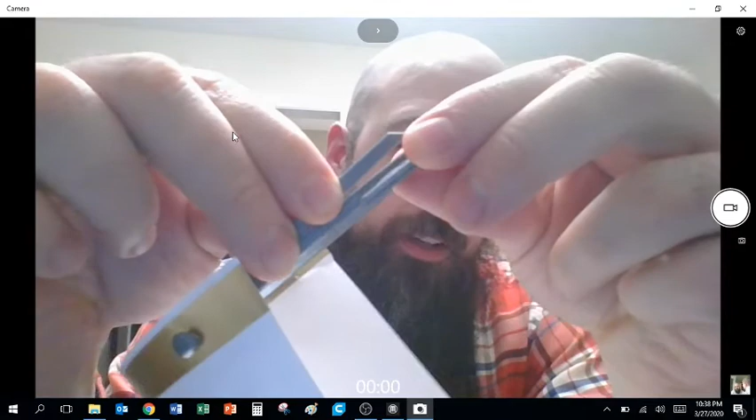I've already printed one. The first one took about an hour and a half on my Ender 3, which is different from the MakerBots. It fits a normal 3-hole punch piece of paper well, so if we get plastic sheets, using a 3-hole punch to punch the holes would be perfect. Something I noticed is I printed this at 50% infill, and it cracked a little when I pulled it off the print bed. So we may want to mess with the infill settings to make it more rigid or robust, and I'll share anything I find.

So the rest of this video, I'm going to show you how I set up the slicer, and then I'm going to make another video showing how I set up my printer.

I'm going to be using the MakerBot Print Slicer program. If you don't have it, Google MakerBot Slicer and click the first link. The newest version is the one I'm using. When you open it, it'll ask you to sign in. If you don't have a MakerBot account, you can sign up quickly - it's free, just a username and password.

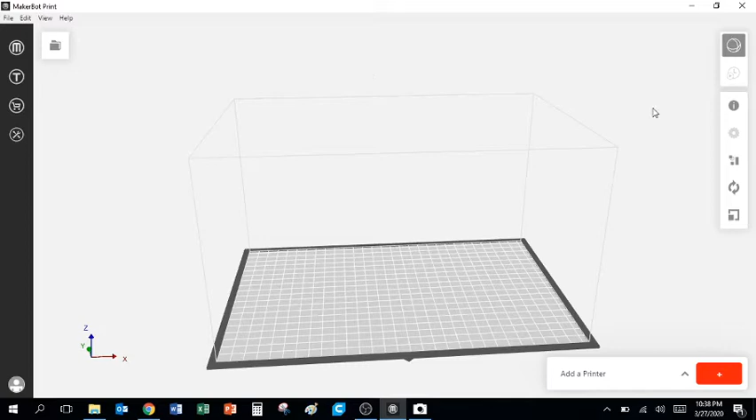Once logged in, your screen will look like this. In the bottom right, it says add printer. We want to add the Replicator Plus, which is the type we're using. Click the red plus symbol, add an unconnected printer, scroll down and hit Replicator Plus. Now we're all set.

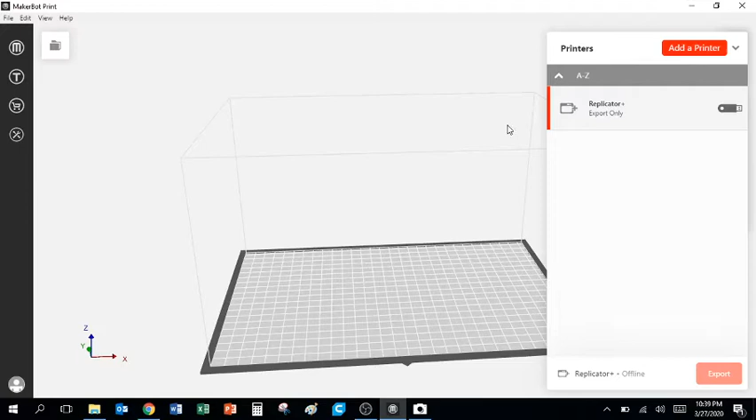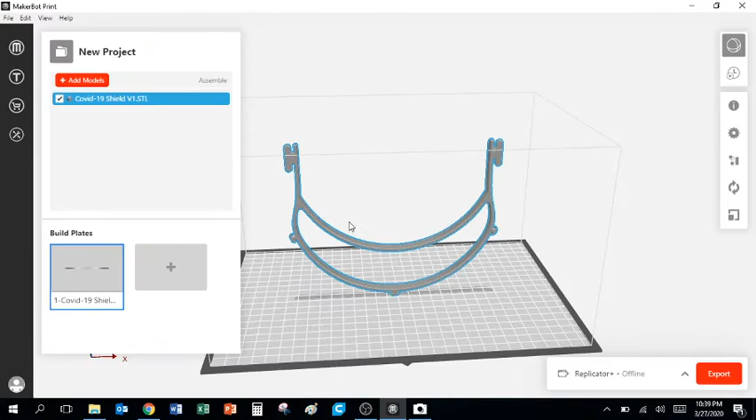Our slicer is now configured for our printer. We're going to go to the upper left to the project panel and add a model. I emailed everybody the unzipped STL file we'll be using, so wherever you saved that, double click on it.

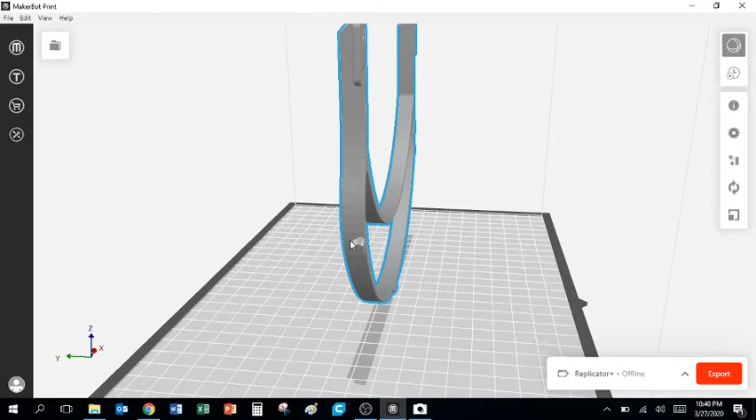So the way this comes oriented, at least on mine, is not the way we want to print it - we'd like to lay it down flat. If you zoom in close on these notches where the paper attaches, you'll notice it's flush on the right hand side but doesn't touch the left hand side. So we'd like to print this with this side facing down so no supports are needed. If we print it the other way, the slicer will add supports since there's nothing underneath to hold them up.

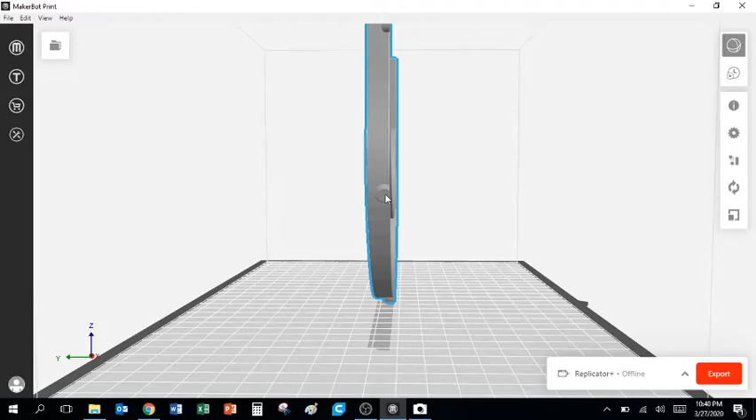So we click on our object, click the orient button, and rotate this 90 degrees - looks like I picked the right way. We'll move this to the center, and it should be positioned the way we want.

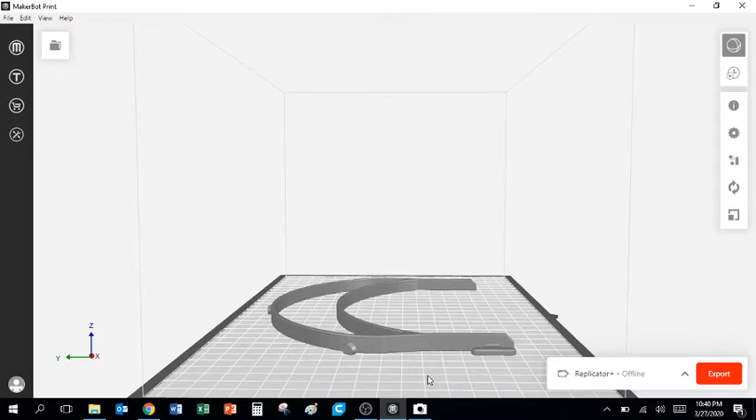The other thing we may want to do is mess with settings like infill, as I mentioned, and anything else that may help us print faster. The first time I sliced this, it was about 2 hours. I think if we change a couple things, we can get it down quite a bit.

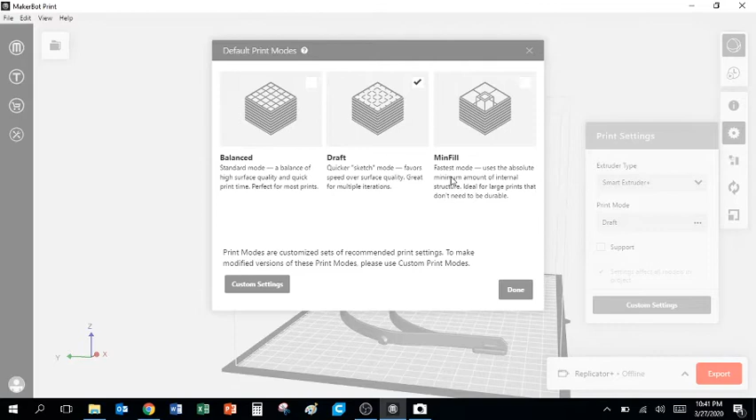Under print settings, the default is a balanced option, which has higher quality but takes longer to print. We want to go for draft, which is much quicker. It won't be as nice of a print, but I don't think that will be really important for this.

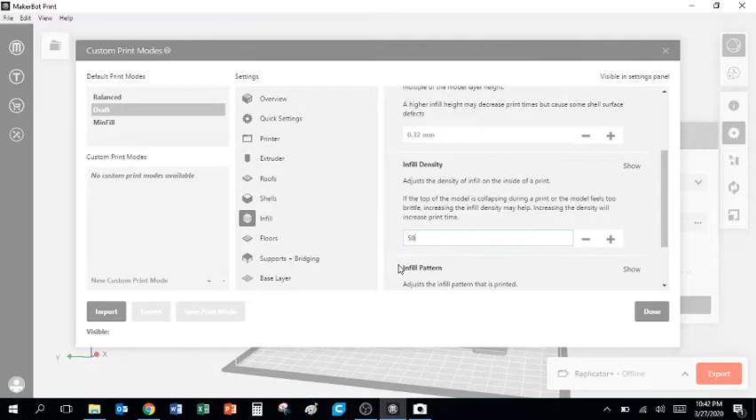We're also going to go to custom settings, to infill and infill percentage. Like I said, the percentage I used on my first one was 50%. My suspicion is that 50% infill is probably better on a MakerBot than on other printers, but this may be something we want to change.

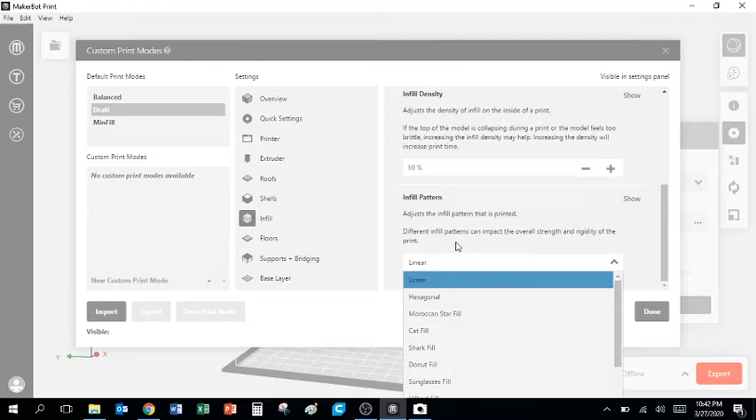Also, the infill pattern - MakerBot gives you a lot of different options, and I know very little about the differences, but some are better for strength and some are better for speed. Really, I think the only way to figure it out is to click on each one, slice it, and find out the time.

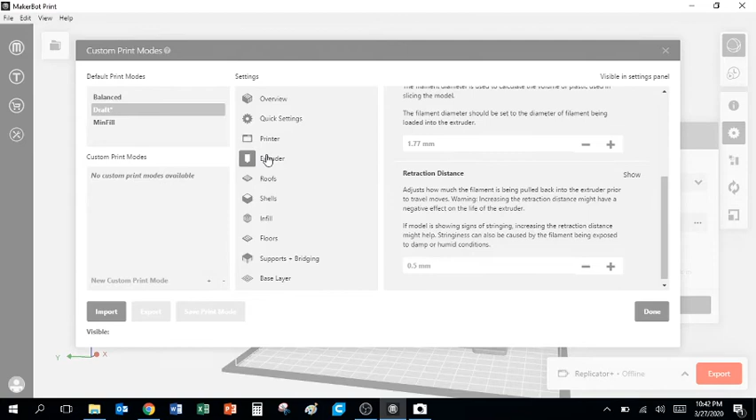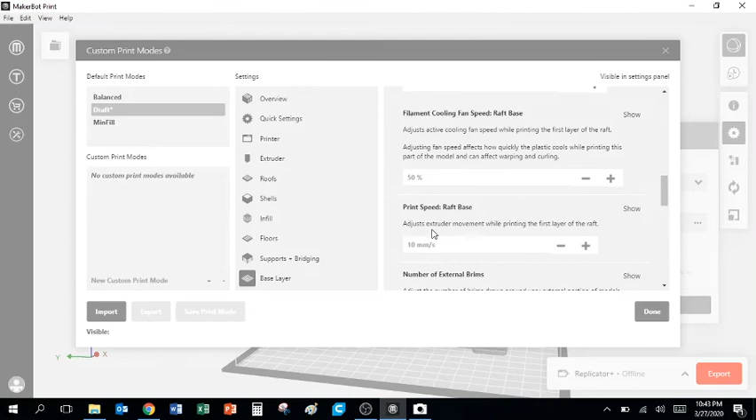That'll be something I'll try to do, but we could all try it and see what we find. Once we have our infill pattern, there are other settings - under printer, travel speed may be something to mess with, and probably print speed and the first raft layer. There are lots of places we can change the speed if we want to really get this time down, or we could just come back every hour and a half instead of every hour.

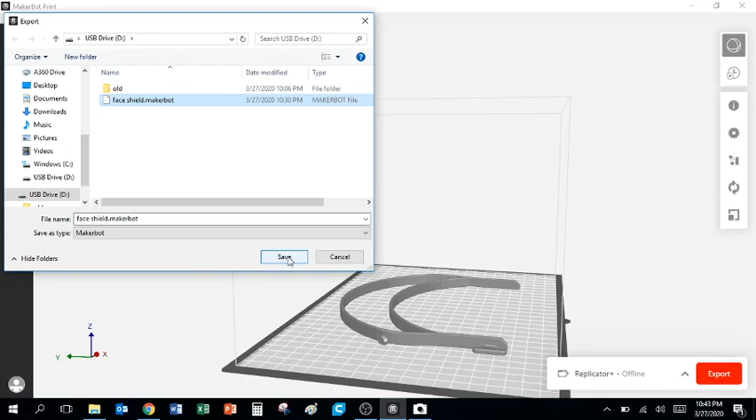Once we have all the settings the way we want, we're going to hit export. I did this once already so it's on my flash drive, but you'll want to save it to a flash drive if you have one - otherwise save it to your desktop and get a flash drive later. We'll hit save, and I'm going to replace the one I did before. Once this red bar is done, it'll be good to go.

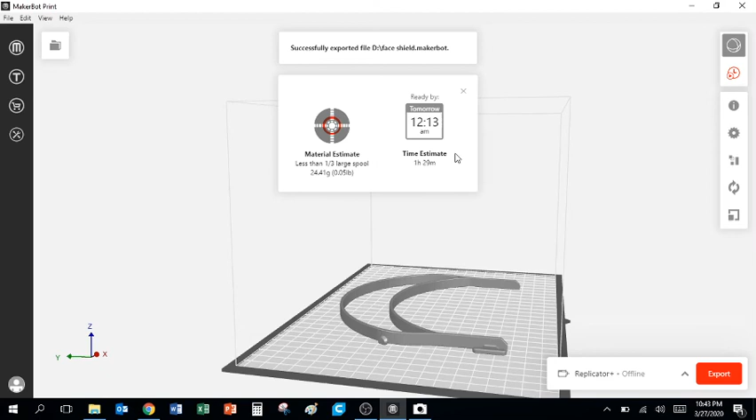With the draft setting, that takes about half an hour off the print time, so we could mess with other settings and see if we can get it down further. But that's it for this video - I'm going to make a second video showing how to make sure the printer is set up correctly. So good luck.